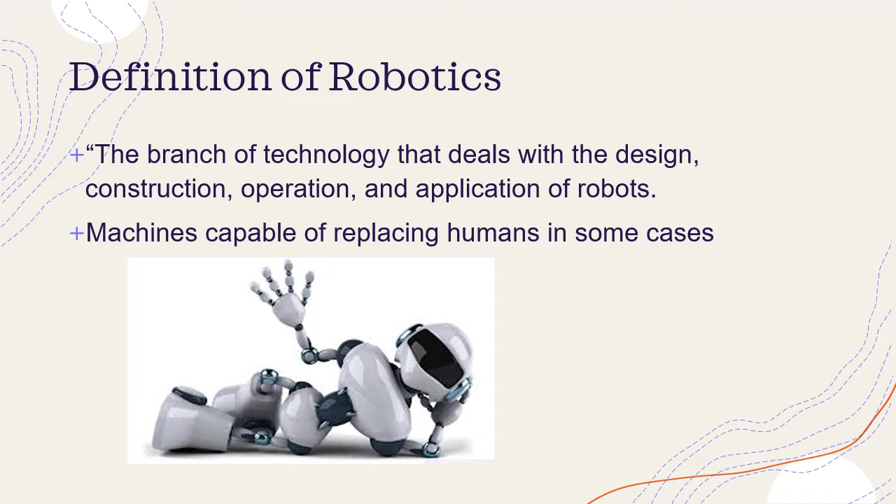The definition of robotics: the branch of technology that deals with the design, construction, operation, and application of robots. Basically, they're machines capable of replacing human beings in some cases.

Early conception of robotic devices. In 3000 BC, Egyptian water clocks used human-shaped figurines to hit a bell on the hour. In 400 BC, Archytas Tarentum invented a wooden pigeon that was able to fly. A common occurrence in Hellenic Egypt was the construction of hydraulic-operated statues that could speak and make gestures. These are all pre-technological inceptions of robotics.

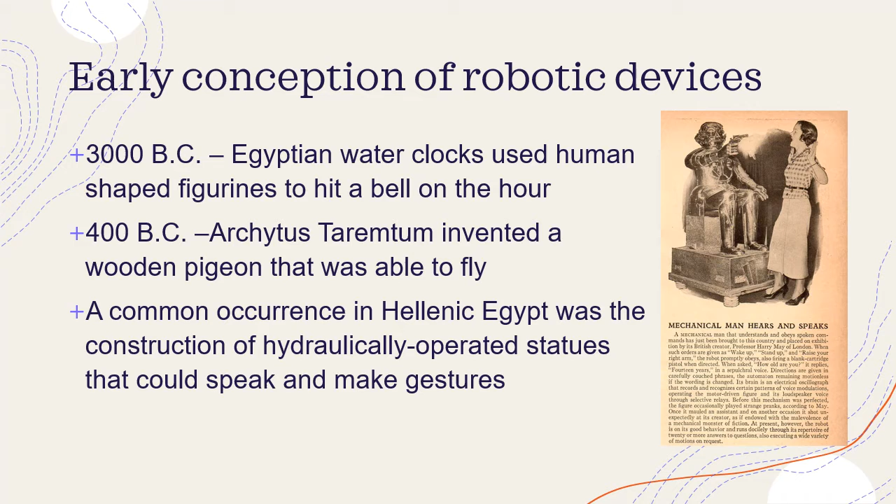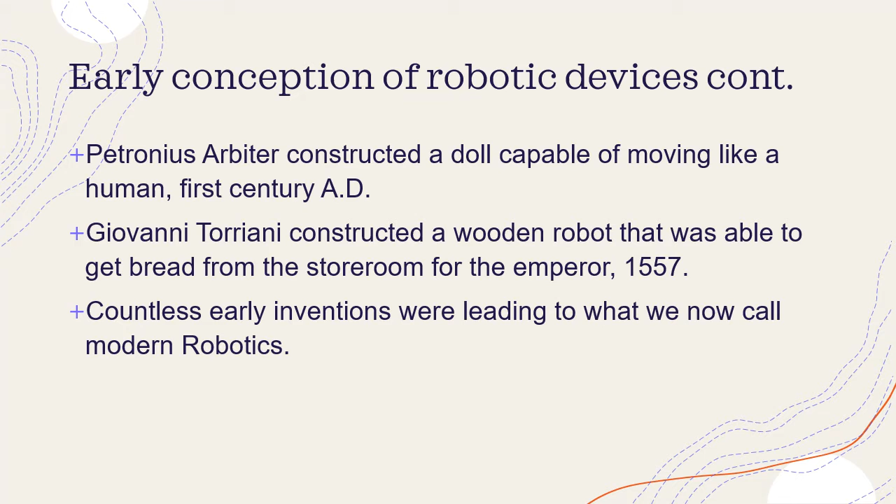Early conception of robotic devices, continued. Petronius Arbiter constructed a doll capable of moving like a human in the 1st century AD. Giovanni Torriani constructed a wooden robot that was able to get bread from the storeroom for the emperor in 1557. Countless early inventions were leading to what we now call modern robotics.

Earliest modern robots. George C. Devol, an inventor from Louisville, Kentucky, invented and patented a reprogrammable manipulator called Unimate from the company Universal Automation. He tried unsuccessfully to sell his patent for the next decade.

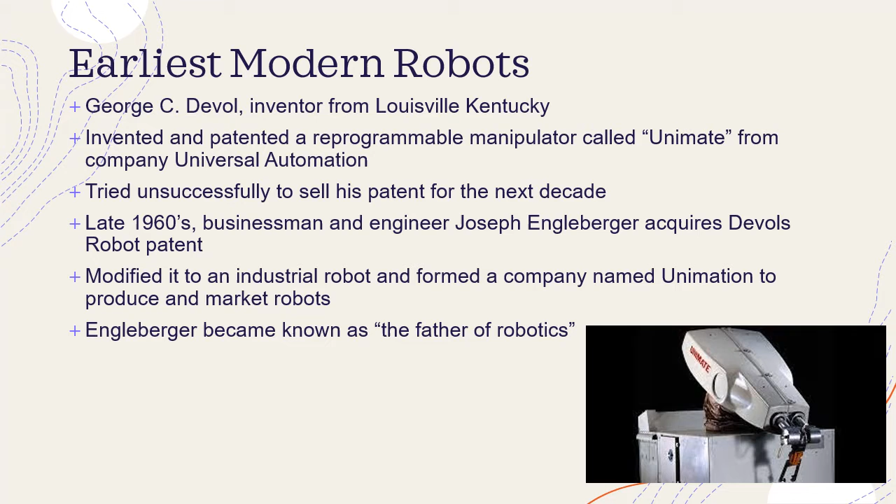Earliest modern robots, continued. In 1958, at the Stanford Research Institute, Charles Rosen led a team to develop a robot called Shakey. Shakey was more advanced than Unimate and was designed for specialized industrial application. Shakey was able to wheel around a room, observe with its eyes, and respond in a small degree to its environment.

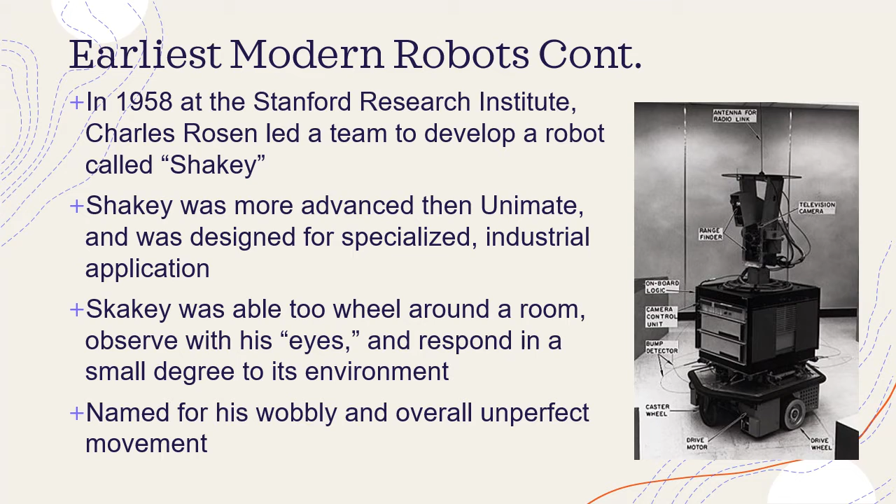Shakey was named for its wobbly and overall imperfect movement. Off to the right is a picture of the robot Shakey, and as you can see, it was very clunky and clearly well named.

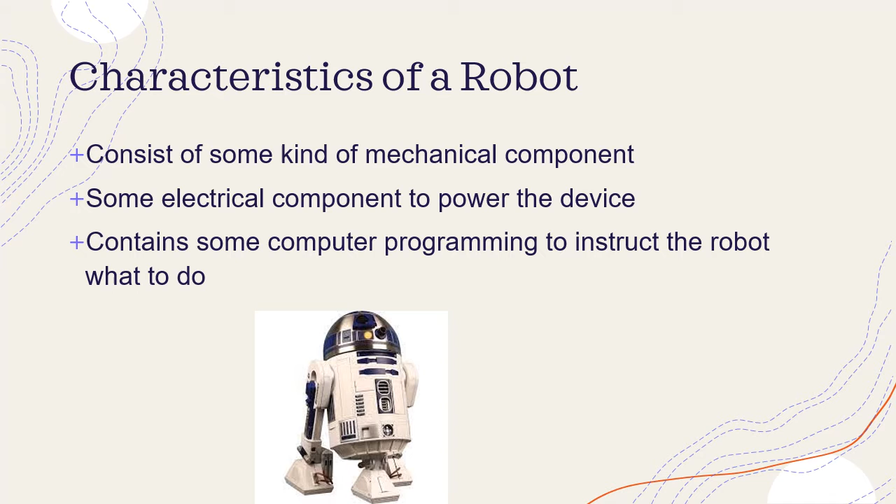In the next few slides, I will be discussing some specific robots in the medical, construction, and exploration fields.

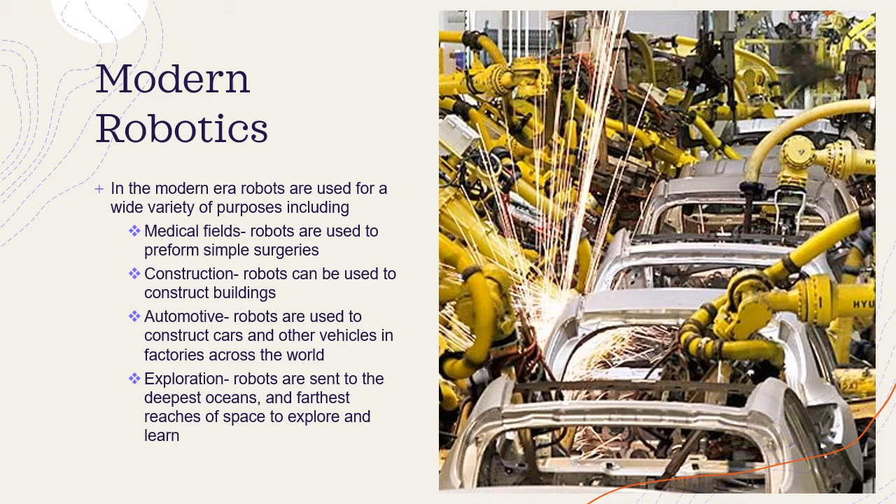Medical robots: the Da Vinci surgical system. The Da Vinci surgical system allows surgeons to perform complex, minimally invasive surgeries with precision and accuracy. It has been successfully used in thousands of surgeries and consists of a console, a patient cart with 4 interactive arms, and a high-performance vision system.

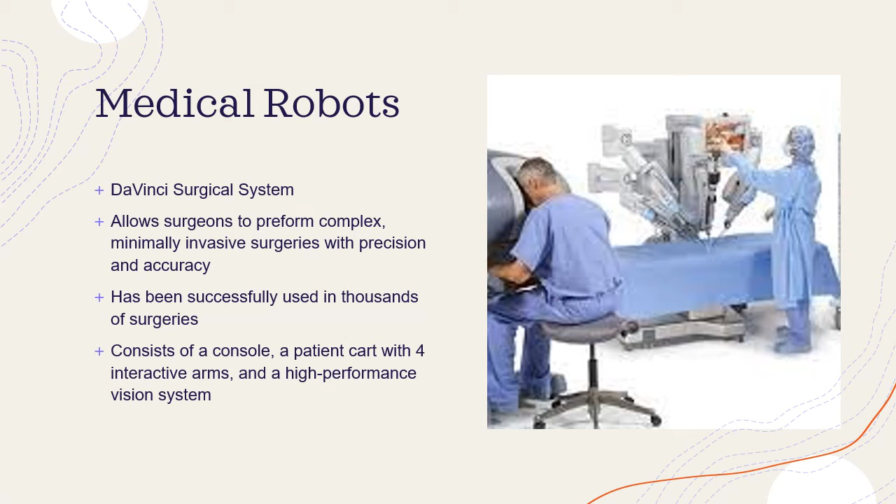Construction robots: the Autonomous Robotic Construction System, known as ARCS, is capable of 3D printing a home for less than $6,000 in materials. Construction of a 1,900 square foot home takes less than 48 hours over an 8-day period. This robot eliminates over 20 manual labor-intensive processes.

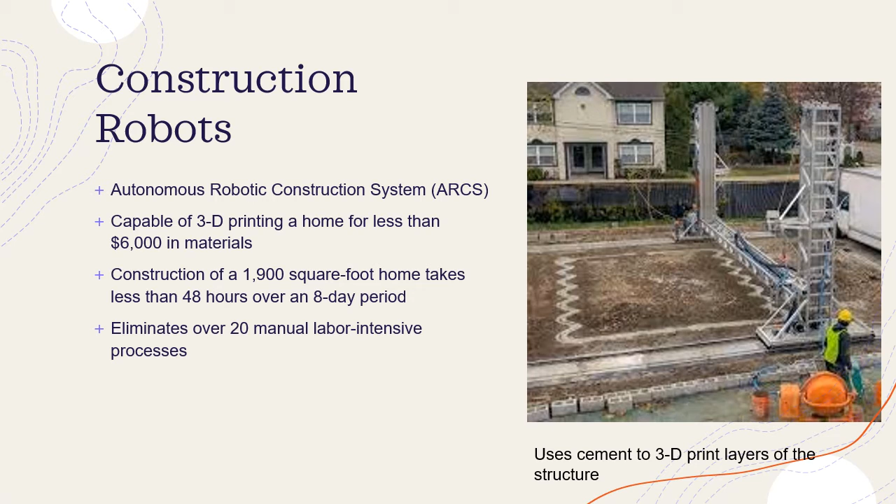Pictured on the right is the Autonomous Robotic Construction System, and it uses layers of cement to 3D print a structure.

The future of robotics. With technology advancement, robots are expected to eliminate 6% of all jobs in the US alone by 2021. Robots will continue to improve as technology continues to grow better and cheaper. Robots will become an even more common household technology.

Robotics technology will one day go as far as to create a robot that can come close to thinking as a human being would. To the right, we have a picture of a lifelike robot that exists today, and her name is Sophia.

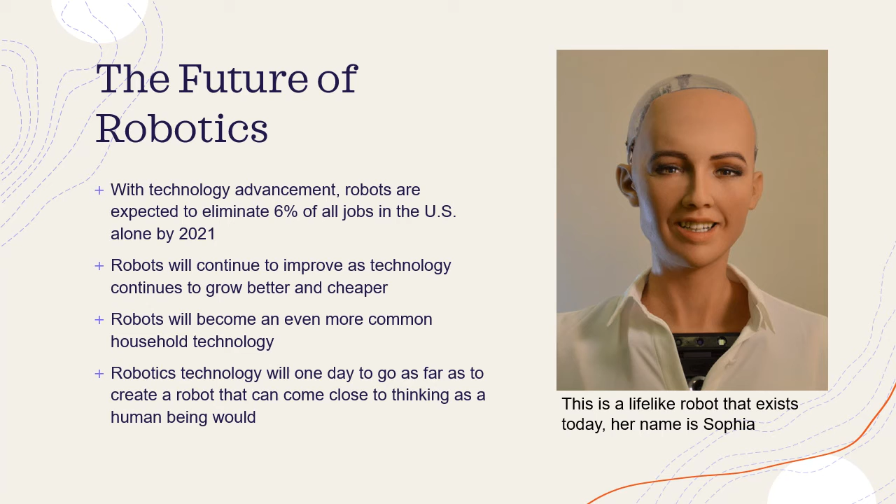I wanted to create a slide to talk about some specific robots that I thought were pretty cool. This robot is named Spot, from a company out of Boston called Boston Dynamics. The robot is able to automatically sense and inspect, capture data, and explore without boundaries.

The robot is controlled using a tablet app and built-in cameras. It can carry and power up to 14 kilograms of equipment, and you could purchase it from Boston Dynamics for $74,500.

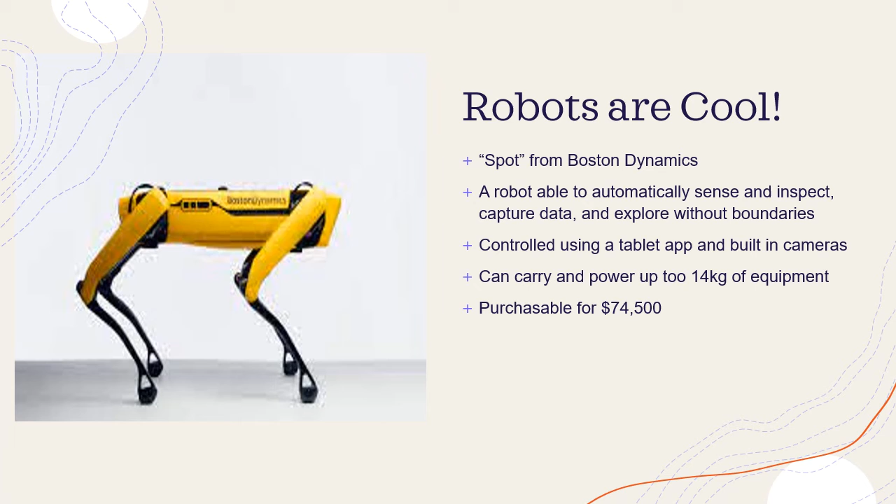Another robot I thought is cool is this 18-meter tall, which is 59 feet, Gundam robot constructed in Yokohama, Japan. The robot is currently being constructed and is a centerpiece of Gundam Factory Yokohama, a popular Japanese tourist attraction. The robot Gundam can take several small steps, take a knee, stand up, and point to the sky.

This attraction was meant to be completed in construction and opened, but thanks to the coronavirus pandemic, isn't supposed to open until December 2020.

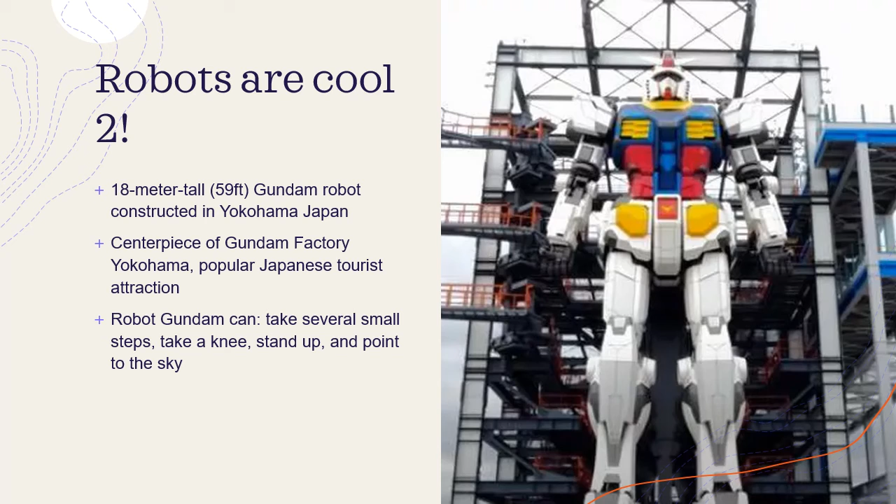The final cool robot I would like to bring attention to is called the Samsung Bot Air. It automatically goes around your home and purifies the air. Onboard sensors help the robot gauge air quality, and if it determines less than satisfactory air quality, it will move to the source and purify the air.

It gives progress of the home's air quality using lighting — red means bad, green means fresh air. To the right, we have a picture of the Samsung Bot Air.

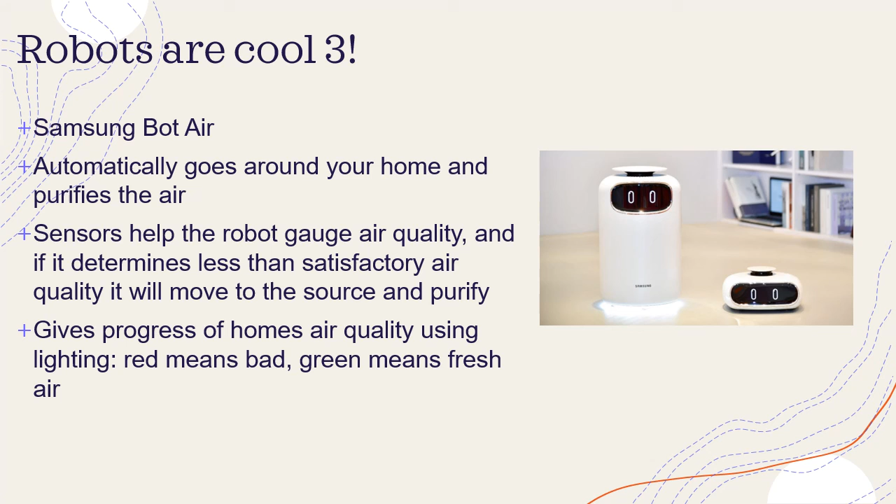In conclusion, robots have been conceptualized for thousands of years. Robotics technology will continue to advance at an even greater rate than it has, and one day robots will be far more advanced than anyone today could fathom.